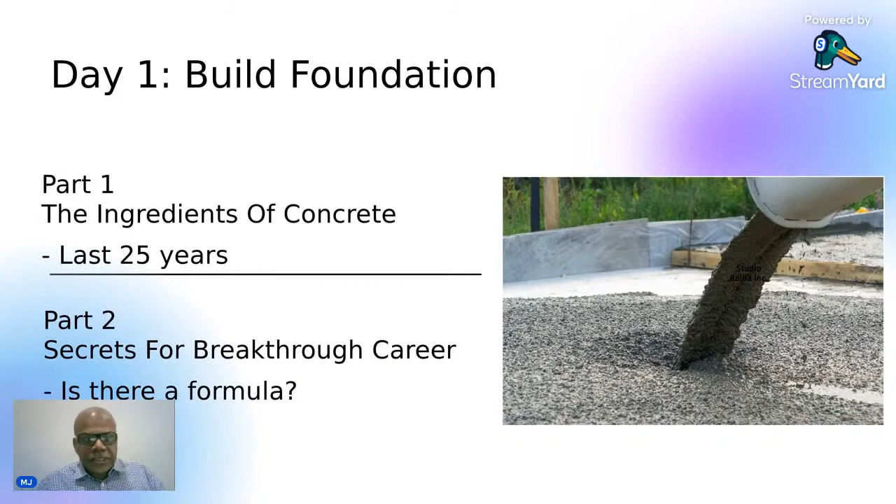Tomorrow, we are going to see properties of concrete, right? So today we are building the foundation, ingredients of concrete, what are the various materials. Tomorrow, properties of concrete. Now so many experts are here today with us, and there are many of my friends who are working as quality control engineers in a batching plant on a site. They are doing their mix designs every day, but unfortunately all our knowledge stops at compressive strength.

Okay, now my question is coming to you. So you have to tell me one property of concrete after the compressive strength. Let me see if you know. Any one property you can give. So for example, I'm in a batching plant, I'm mixing the material, I'm preparing concrete, I check the slump, I check compaction factor, maybe I check flow if it is self-compacting concrete. The concrete goes to the site, I cast the cubes, right? And I check the compressive strength.

Okay, after compressive strength, after your concrete has set, what can be other properties of concrete which as a concrete specialist you should know? So please tell me, please just type one word which you know.

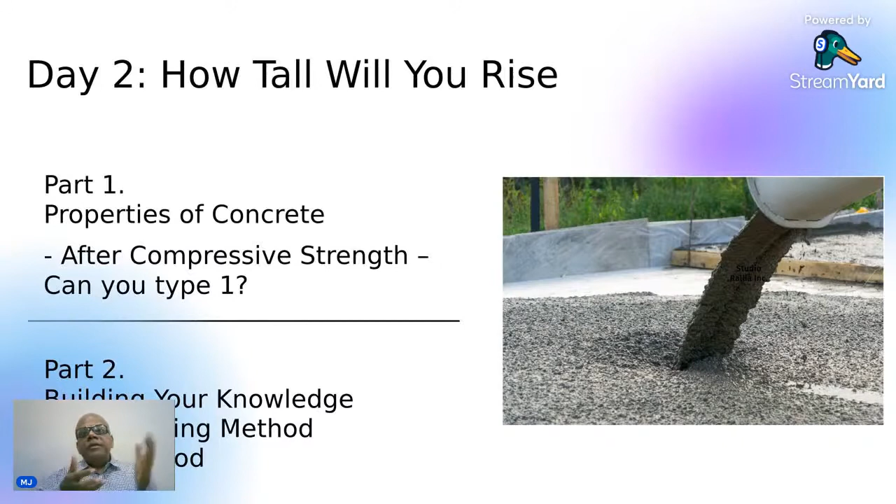So normally there is a problem solution method. You have a problem, right? How to make a pumped concrete, and then you find the solution. That is problem solution. This is the other method, solution problem, but we'll discuss about it tomorrow. So that is tomorrow, part 2.

And third day is the future of concrete. So you have understood the properties of concrete, but what is in the future? Next 5 to 10 years, all of us have to prepare ourselves for that future if you want to be discovered as an expert. So we will discuss on day 3, future of concrete and what is missing in the concrete today. Think about it. You have 2 more days. What is missing in the concrete today, which is going to be there in the concrete maybe after 5 years? That will define the future of concrete for us.

I will also discuss with you study plan. You know, this is your long journey to become a concrete expert, and how you should approach this subject slowly every day, 30 minutes, 1 hour. But the problem is the difference between the good and the great, the good and the best. We will discuss how good can become an enemy. Once we know we are good, we stop growing. Once I know concrete mix design, chalo, I know everything. So you need to grow, and you need to have a plan for that. I will share that with you. Okay, let's go ahead.

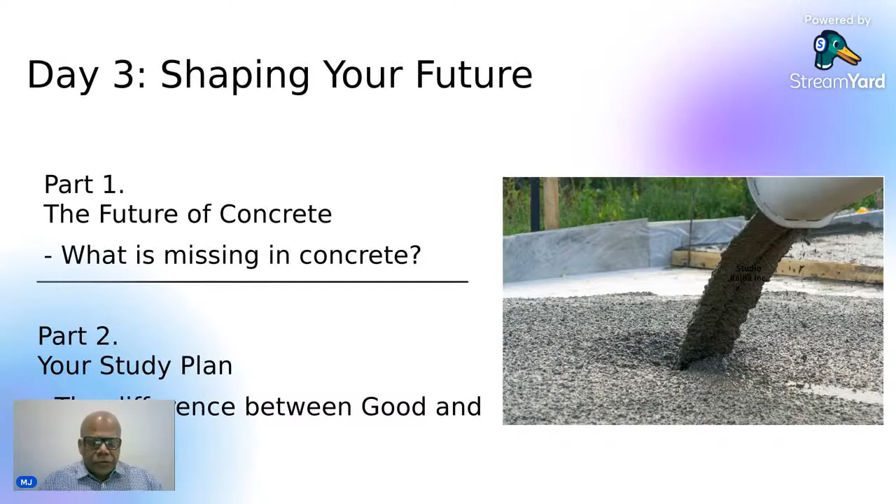So you are spending 3 days, average 1 hour or 1.5 hours a day. So 3 to 5 hours you are spending here with me. So what is my commitment to you? My commitment is after these 3 days, you would definitely have upgraded your knowledge. You would have understood a great formula, hack we call, na? A career hack, and probably your life. So that is my commitment, because impossible is nothing. The great Adidas ad, which I like and which I'm just using here. Okay, let's go ahead.

So when we look at next 5 years, the year 2021 has just ended, and how much cement we have consumed? 350 million tons of cement is consumed in India this year. So huge quantity, right? But the growth is going to be so phenomenal all over the world, particularly in India, because we have to still catch up. China is still 20 years ahead of us. So we have to catch up with so much development. The plans are there, and just by year 2025 the cement consumption is going to be twice, right?

So when the cement consumption increases, around 50% of the total cement goes straight away into concrete. So my second question to you: when you are a concrete specialist, normally we focus only on concrete, right? RMC concrete particularly. There are so many other things. Okay, site mix concrete is also there, but there are so many other uses of cement where you need a concrete specialist. So whenever you look at the subject of concrete, you have to also keep in mind your own career and link these two things.

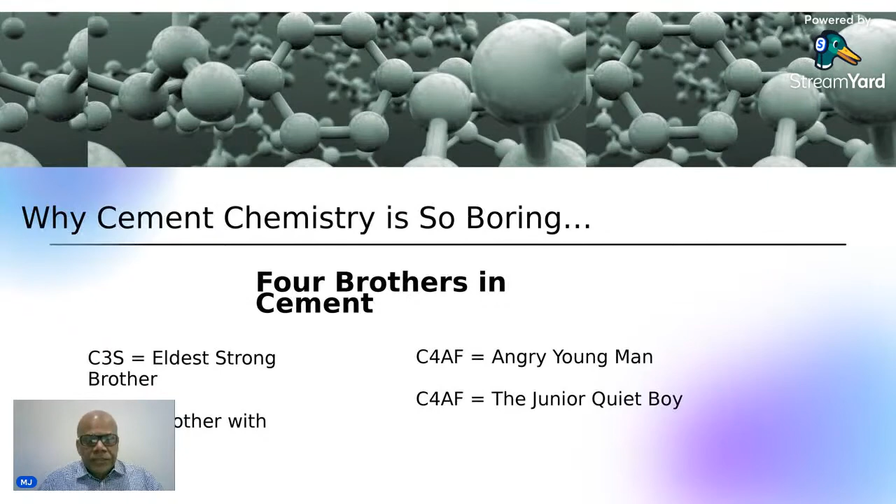So cement is a compound in which there are four brothers staying. If you understand these four brothers, you will fully understand the complete concrete chemistry. The first brother is the strong brother, tricalcium silicate. The second brother has a lot of stamina. He can stay and work for a long time, which is dicalcium silicate. The third brother is an angry young man, tricalcium aluminate. And the fourth one is the quiet boy, tetracalcium aluminoferrite. Now, when these brothers participate in our hydration, in our concrete, each one plays a different role.

So the first brother, you can see, is C3S, tricalcium silicate. The slide is a bit blurry, sorry for that. Let me try to go full slide, so I remove my face. Probably you can see now. So the first brother is tricalcium silicate. Remember these words, C3S. So in cement chemistry, everything is further shrunk down.

Mr. Bosle is asking how many civil engineers are there. Okay, we'll take the questions in the end. Anu, please note all these questions, interesting questions.

Tricalcium silicate. So imagine we are all standing on a construction site. Are you able to imagine that? We are standing on the site. In front of us a transit mixer is rotating. And now, allow me to come in the picture for a short time. There is a mixer rotating, and now you are putting all the raw material inside. What have you put? Cement, sand, aggregates, water, maybe admixture.

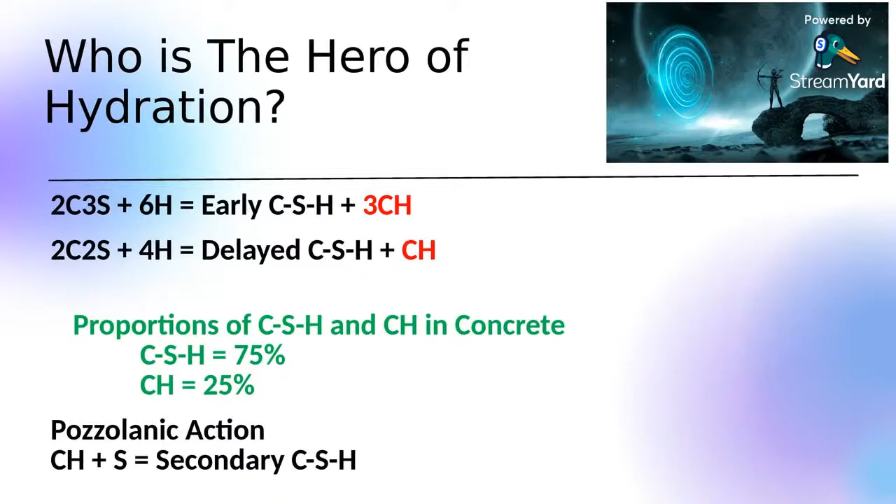By the way, Mr. Sanjay Karne is here, who has done a great job in Dirk when Pozzocrete was manufactured and marketed. It is still being done, and Sanjay, I believe, now is in Gulf, but he's one of the real experts when it comes to Pozzocrete.

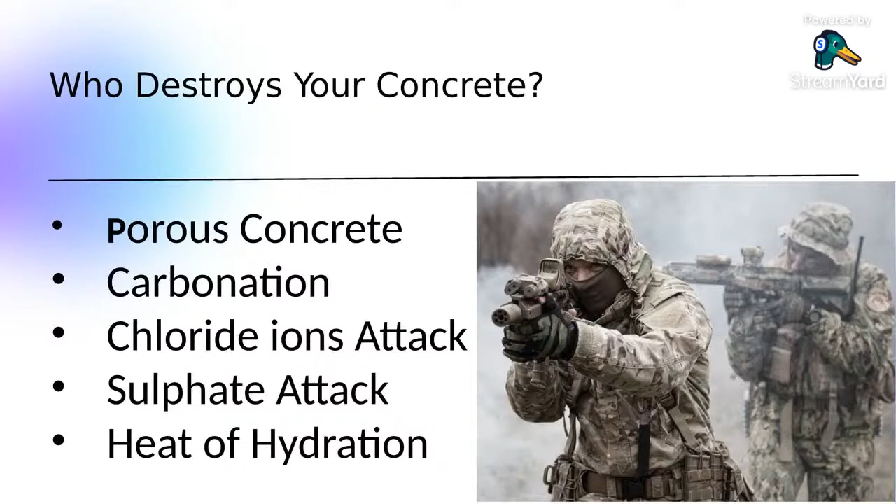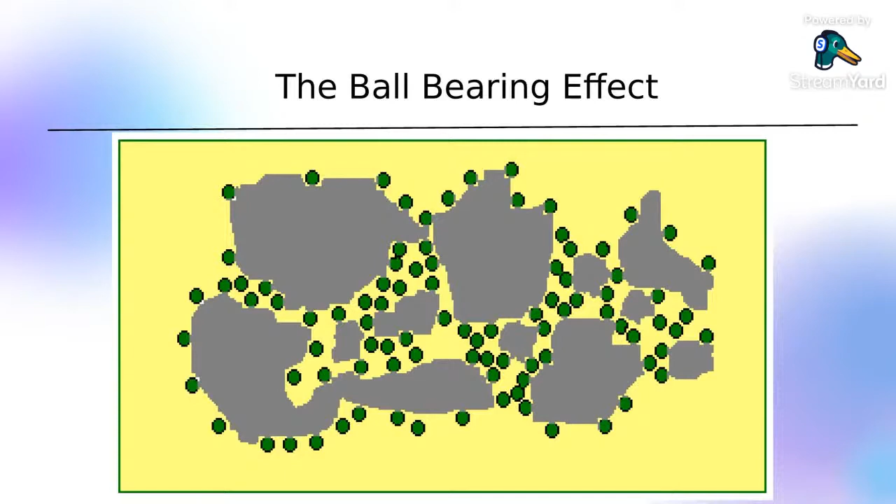So we go ahead. I have a great story to tell you about this ball bearing effect. And looking at the time, I'm taking too much time of all of us. I will skip this story, and tomorrow early, as we begin the session, I will share the story of the ball bearing effect with you. Not today, because I have not yet reached the career breakthrough secret formula and how we will finish by 7:30, including question and answer. So let's keep that story for tomorrow.

Now we come to fly ash classification. When this fly ash comes from the thermal power station, there are various sizes in this fly ash. All of us know 45 micron is what the fineness of fly ash should be, maximum below 45 micron. If you get a fly ash with 10% retention, 90% passing 45 micron, wow, great. Only one company I know, Dirk Pozzocrete, is doing that great job. No one else, I think, is supplying that. But yes, there is ultrafine fly ash now available, but you achieve it through grinding. Again, a very deep subject.

At this point, just remember, you can put a classifier and process the fly ash by physically separating the particles. So fine particles will go in this chamber, coarse particles will go in that chamber. Physical classification through air velocity. When you move the particles at a very high speed in a classification system, all the particles are separated based on their sizes, and you can actually collect the fine fly ash. How much we want? 10%.

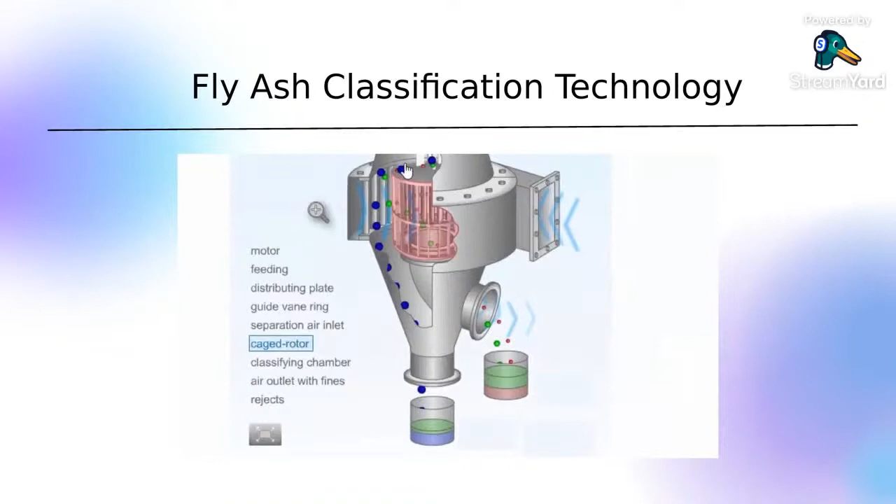Even if it is unprocessed fly ash, no processing, you have ROS 25%, still try to use it at 30% level, because fly ash has some great hidden benefits. What are they? Let's go ahead and see, even if the fly ash is slightly coarse. But before I go there, here are some challenges that all of us have with fly ash.

First is this inconsistent quality, because there is only one company in the whole country who is processing fly ash. Why did this happen? Such a beautiful resource, this fly ash, and why has it happened that there is only one company in India who can give you this top quality fly ash? So this German person, Mr. George Dirk, came to India in the year 2000. And at that time, he came and met the chief minister of Maharashtra.

And he got a lot of help from the state government, because he was looking at Europe, where so much fly ash was used in concrete and producing great structures. The Channel Tunnel between France and UK, 37% fly ash used in the 90s. And in India, so much fly ash was lying around, nobody was using it. So he looked at it as a business opportunity.

So he came to India, entered an agreement with the state government, and set up a fly ash processing plant at Nashik. Because he had a long contract, a 30-year contract, he could invest crores of rupees in a thing called fly ash, which was a waste. Could you do that? Go to a new country, a third world country, coming from Europe, and invest in a technology and spend crores of rupees to produce a product which people have not even heard of, using fly ash in concrete.

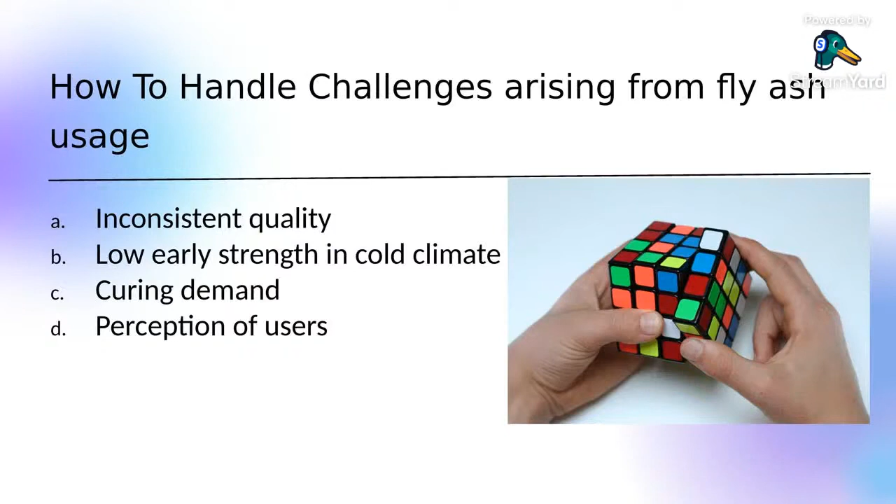So here is a way to fully utilize fly ash to high potential. So I will cover these 4 points now, because we still have to cover many other things, and the actual mix we will try to take on the third day. But let's concentrate now on how you will use high volume fly ash in your concrete. So high replacement levels, I said, keep it 30%, keep it 30%. Okay, your total cementitious might slightly go up, but still it would be an economic concrete for you and a great concrete for your client.

Okay, so you will take care of a lot of issues: pumpability issues, the heat of hydration, the traffic in metro cities. You are producing concrete somewhere, you have to transport it somewhere else, you have to pump the concrete 10 stories high. So all your working issues will be taken care of. Your cost will also come down. So the big boss will be happy, saving money, 30% fly ash. Total cementitious will slightly go up, but still the concrete will not become expensive, and the customer would be happy. So high replacement levels, 30% fly ash.

If you want any help, you can always email me with your mix design, and I will give you suggestions on how to design your concrete for 30%. Even if you have a requirement for early strength, early decentering, we can achieve that also, 1 day strength.